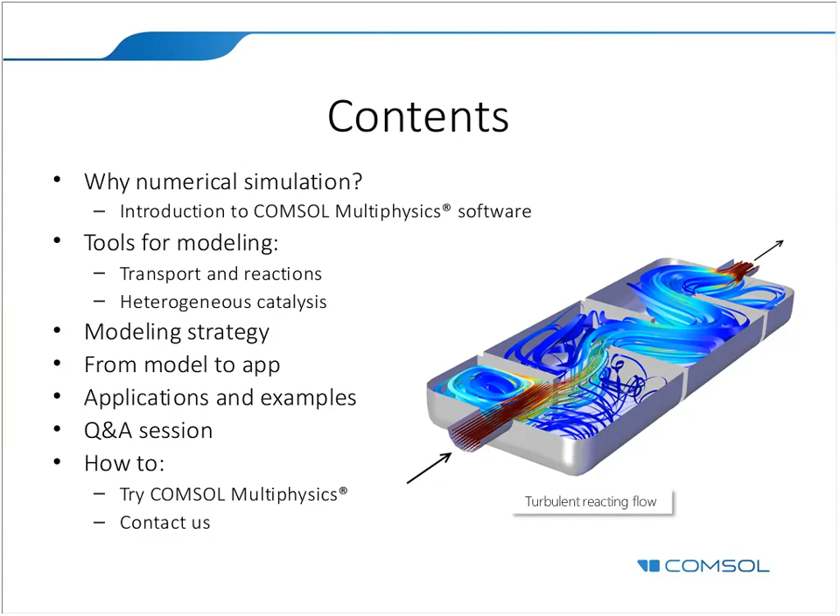Okay. So let's start by asking ourselves a question: why simulate reacting systems? We ask this because traditionally this type of simulation has been quite limited in the chemical engineering education. There has been a lot of relying on experimental and empirical results to govern the design or the studies of a reacting system. And if simulation has existed, it has been to simulate in 0 dimensions, basically, only accounting for the evolution of the reacting system as a function of time.

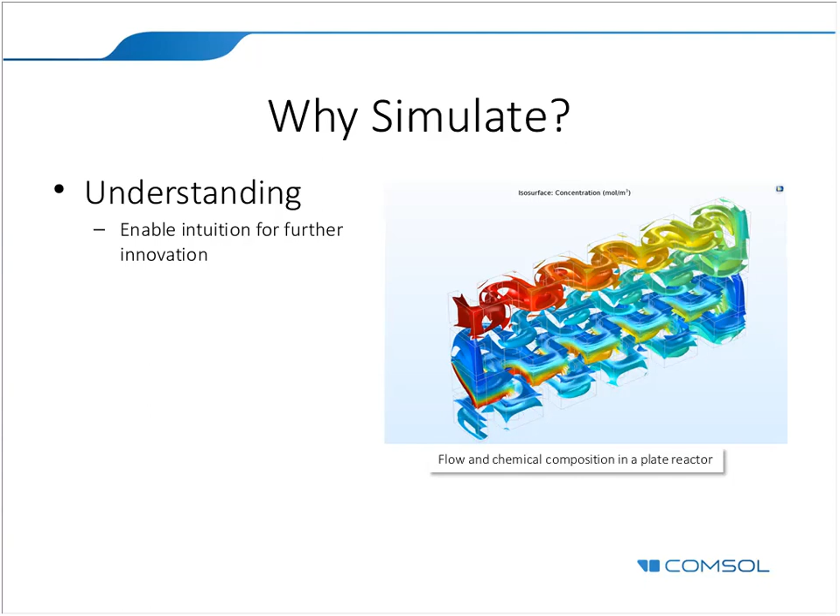But as simulating tools and computational power have increased over the years, simulation has been attainable for all chemical engineers, also high fidelity simulations. So first of all, mathematical modeling and simulation provides an understanding of the different parameters that make up your system and how they affect each other. And with this understanding comes intuition that leads to new ideas that allow you to take big steps forward in the development.

And so modeling and simulations let you propose some design and conditions, and then it allows you to tinker with them and optimize them. And a lot of this can be considered and achieved before proceeding to expensive pilot plants. You can stay in the lab for a longer time before you start building prototypes and deploying to manufacture, going to the full scale, for example.

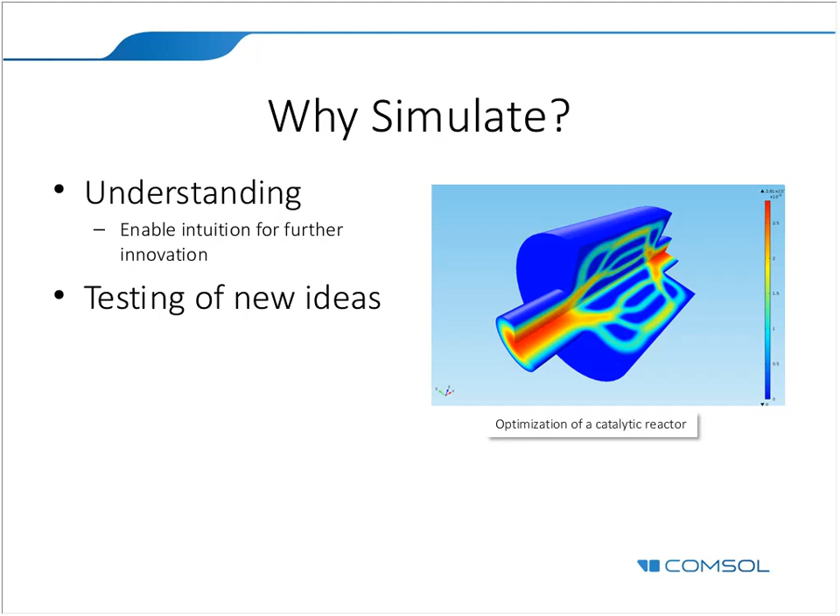And of course, it also lets you propose the full-scale design. Once you have working understanding and once you have improved your model at the lab scale, you can adapt the process to different operating conditions or the reacting system, study it at the full scale. And in some cases, if you're dealing with a process, it also allows you, of course, to optimize it.

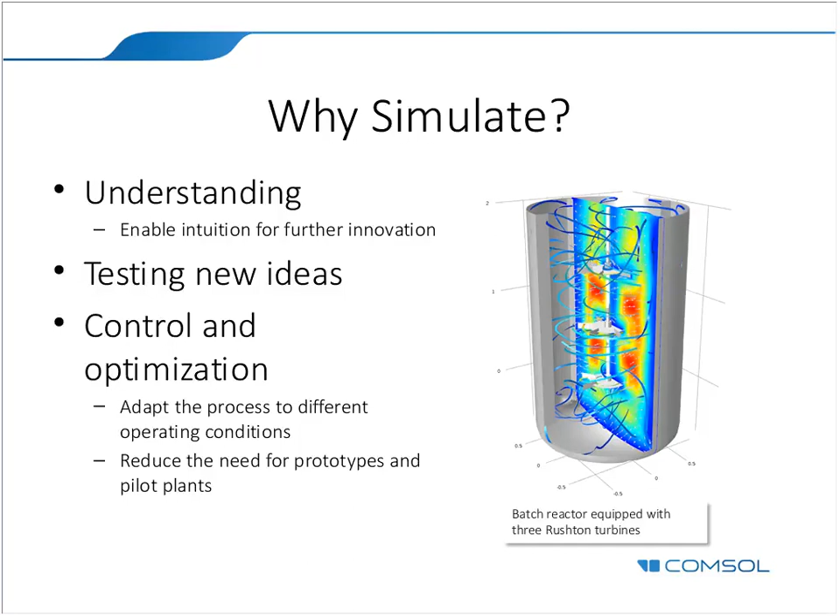And sometimes you need to know what would happen if, for example, an accident happened in a plant, or if an accident would happen in a casino, like one of our users experimented with. What would happen if there was poisonous gas in a ventilation system with reactions and so on. A real-life experiment could be difficult, if not dangerous sometimes. And simulations can provide a decent estimate of what could happen in a relatively inexpensive way.

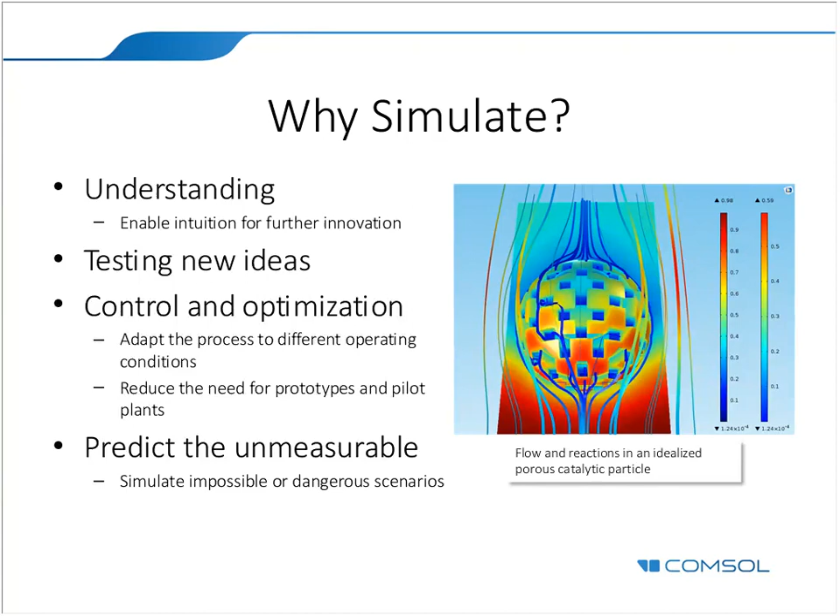But of course, the real world is not simulation. So you have to work together with experimentalists, and you have to validate the models in order to use them for real studies. And so that's also a tool that we include in the COMSOL chemical reaction engineering products: a way to perform parameter estimations and a very efficient way to perform validation of your models with experimental results.

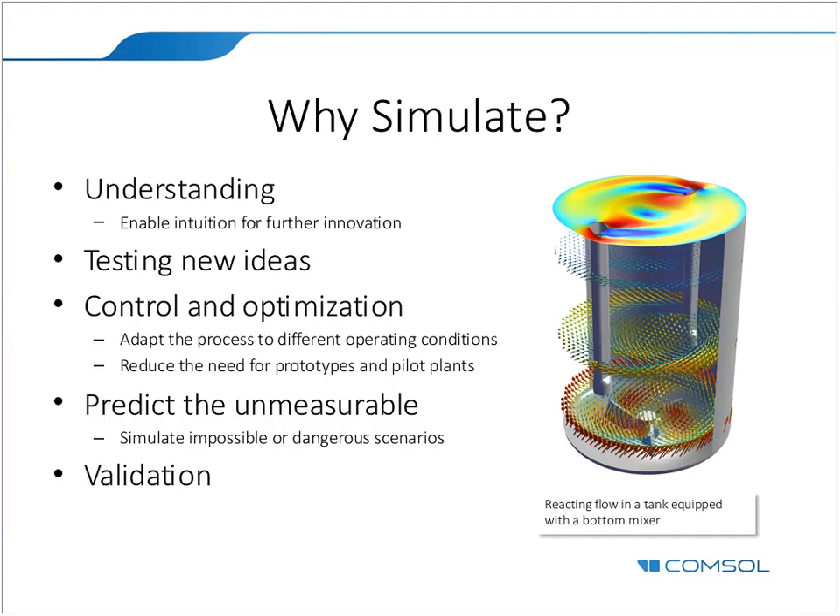And so the Chemical Reaction Engineering Module presents a number of graphical user interfaces in order to model reacting systems, such as chemical reactors, or basic studies of heterogeneous catalysis, and processes with transport and reactions, also including fluid flow. If you need to include turbulent flow or multiphase flow, then you would use the Chemical Reaction Engineering Module in combination with the CFD Module or the Mixer Module.

Then we have more specialized products for modeling of batteries and fuel cells, which actually is an applied branch of chemical reaction engineering. I myself studied chemical reaction engineering with the special branch of applied electrochemistry. And the same thing, we have the Electrodeposition Module, Corrosion Module, and the more generic Electrochemistry Module. Less generic than the Chemical Reaction Engineering Module, but more generic than the other electrochemical products.

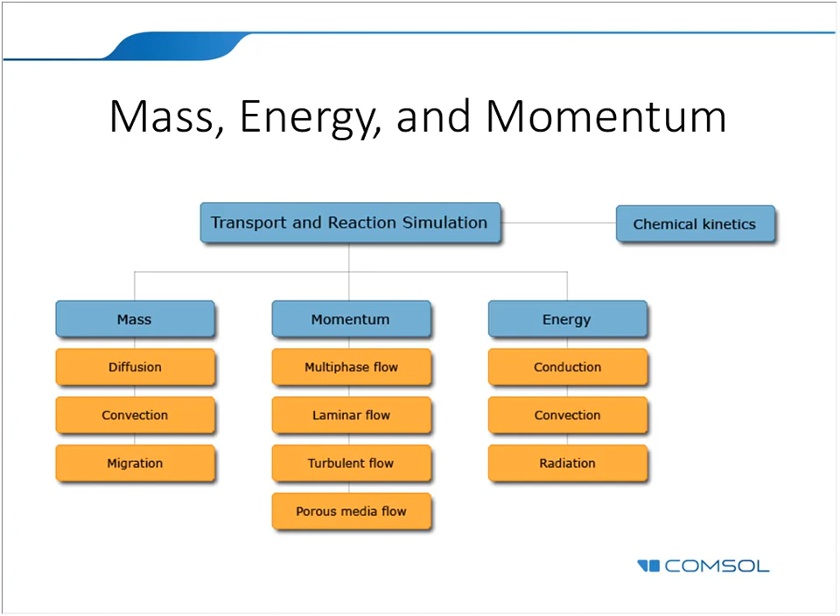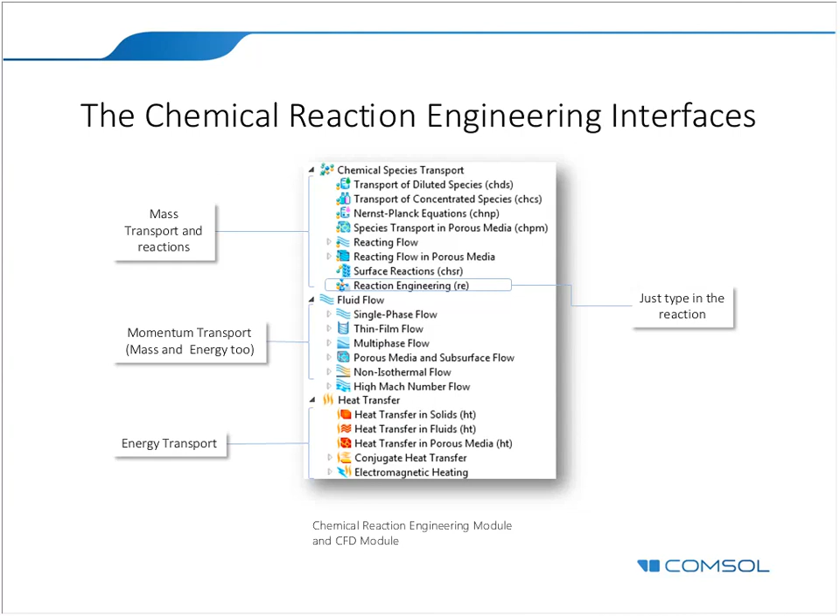So here you can select from transport interfaces to model multicomponent transport and reactions, single-phase and two-phase flow, surface reactions or homogeneous reactions, laminar and turbulent flow, heat transfer with conduction, convection, and radiation, for example. And then a specific chemical species transport interface, the Reaction Engineering interface, is able to generate mass and energy conservation and transport equations from chemical equations that you type in almost like using pen and paper, and I will demonstrate this later on.

A typical modeling strategy, or maybe an ideal modeling strategy, is to start the analysis of a reacting system using perfectly mixed systems, and those are usually the systems that you have in the lab. So a space-independent model with respect to concentration and temperature is a good way to verify and validate the reaction mechanism that you want to study, maybe later on in combination with transport. So once the mechanism is validated and verified, models with concentration and temperature distributions also in space might be investigated.

So we go from studying systems as a function of t, time, to studying systems as a function of time, x, y, and z, for example. And so you might calibrate and compare your model results to experimental data from lab-scale experiments with very controlled composition and temperature. And you might actually use COMSOL to run parameter estimation, and that might give you a good match provided that the mechanism is the correct one, and that you have covered a representative range of operations.

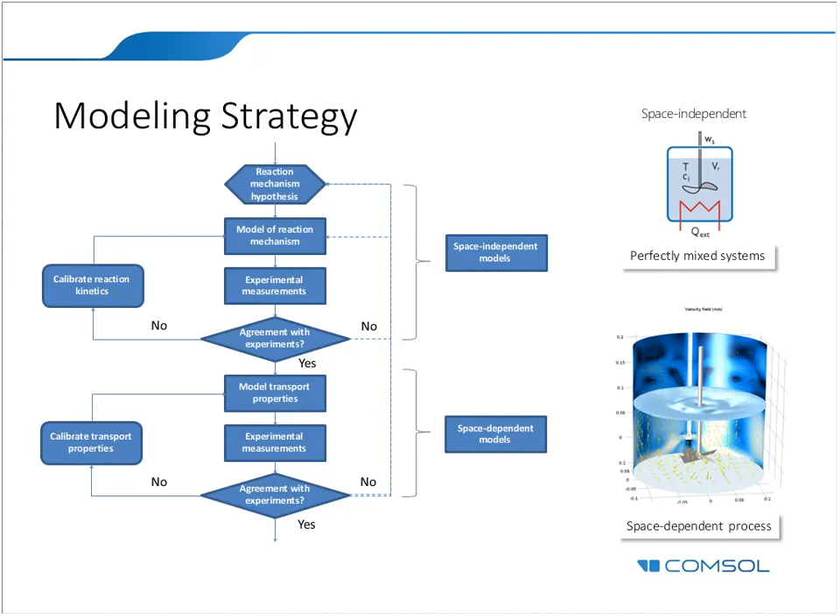So an almost opposite strategy might be implemented for the study of heterogeneous catalysis. Nowadays, with the ability to take microscans and produce 3D geometrical descriptions from microscans, we can now use these geometrical descriptions in detailed 3D models of catalyst particles or catalysts at the microscale. And those detailed models can be used for homogenization in order to model a larger number of particles.

And as you know, if we have to model a larger number of particles in a unit cell, in a fixed bed or a packed bed, or a porous media in general, we cannot afford a detailed description. So a large number of particles can then be used to describe a unit cell or a packed bed reactor, monolithic reactor, or fixed bed reactor. And the homogenized particles model might also be used in fluidized bed models, for example.

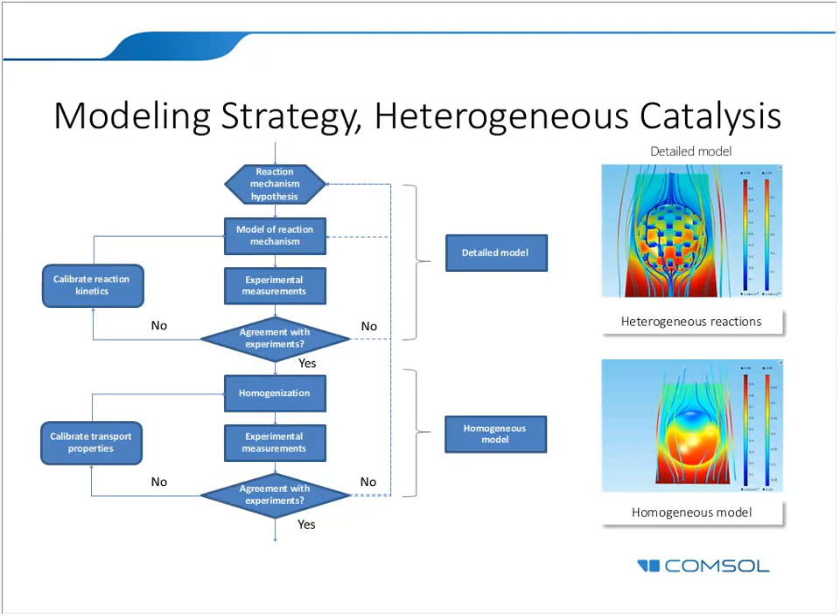But let me start with a little example. Those of you that listened to the Reacting Flow webinar, this is actually the same example, but I will not take it that far because I want to go to an example of a heterogeneous particle and a homogenization of the heterogeneous particle. So I will just show you how to type in a chemical mechanism into COMSOL Multiphysics.

So we will model a reacting system that includes two reactions. One desired reaction, A plus B gives C and D, and then a parasitic reaction, D plus E gives F and G. And I will just very quickly show you how to go from a 0D model, so we will set this up as a space-independent model, and then how we go from a space-independent model to a full space-dependent model.

So now we'll try to share my screen here. And then I will try to go to the... So I hope you see, Jen, do you see the model wizard now? Yes, looks good, Ed. Excellent.

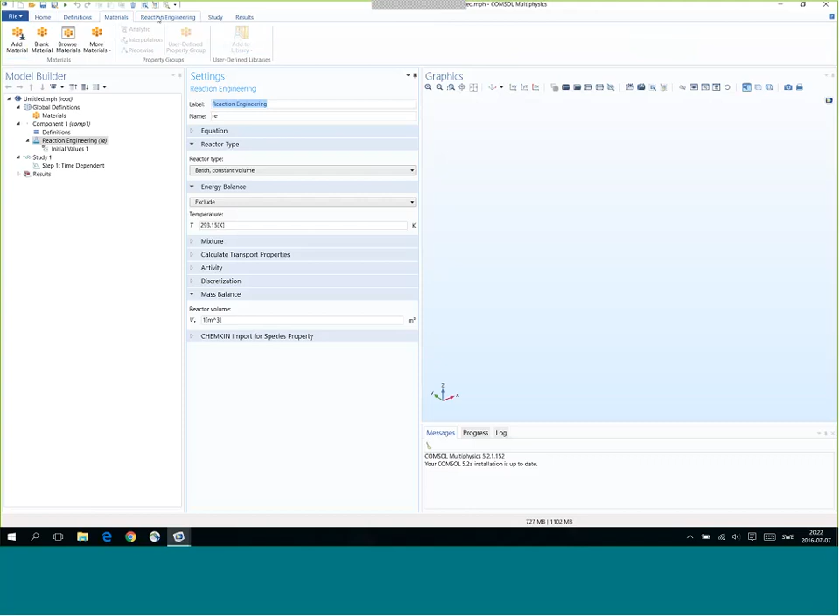But we can compute the study and so on. So a summary of the workflow is contained in the home page. But then the tabs here also depict the workflow. So we have definitions to set up variables and parameters. We have materials to set up different material properties. And we have the reaction engineering interface, which is where we set up our problem.

So what I will do now is I will add a reaction. And I do that by clicking in the ribbon, just clicking reaction. And here I can just type in A plus B gives C plus D. And I can select what type of reaction I want, and I want a reversible reaction. And now we start by modeling an isothermal system, but we could have used an Arrhenius expression with activation energy and so on in order to model a non-isothermal system.

So I just type in the rate coefficient here, 10 cubic meters per second per mole, and the reverse rate constant 2 here. So that's for the first reaction, and we can set up the second parasitic reaction. And you remember that consumes some D by reacting with E and gave F plus G. And also this one, we want it to be reversible, but then with a slightly lower rate constant like this.

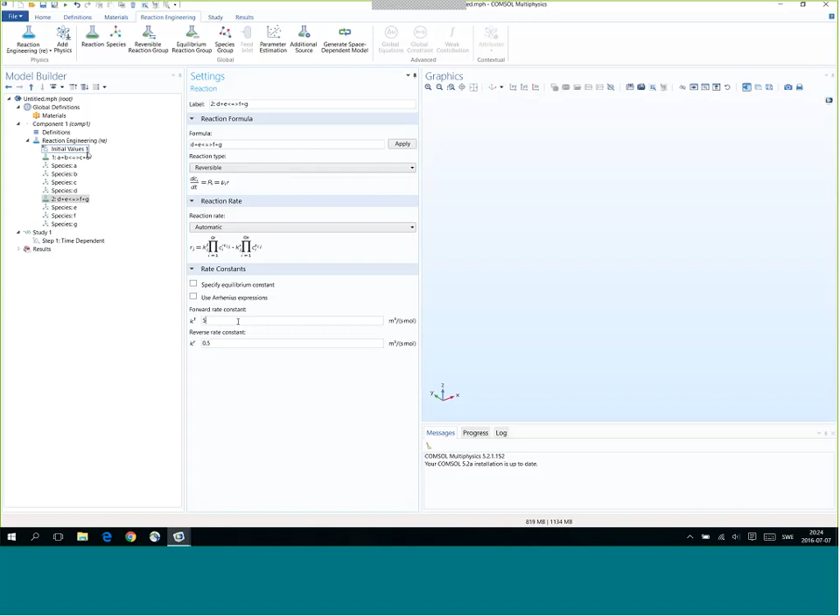And then what we now need is to have the initial values for this set of reactions. So in order for the first reaction, A plus B, to start, we need some A and we need some B. We don't need some C and D because having A and B will start the reaction. But for the parasitic reaction, we need some E. And so we put some initial concentration there.

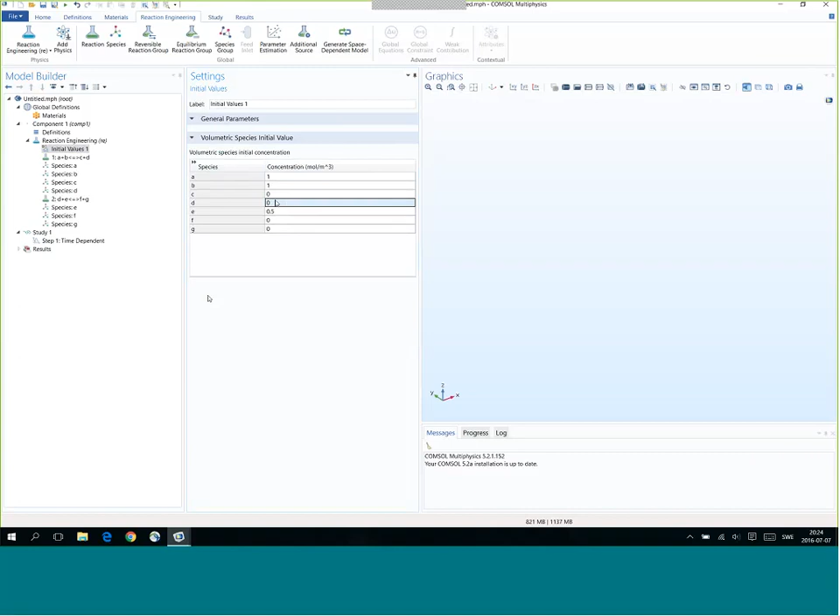And then if we look at the time-dependent study, it goes from 0 to 1 second. And so that's okay. So we go to the study here and we click compute. And hopefully, if I did everything correctly, we should get the concentration profiles as a function of time. And so we can see here that the green line here is A or B, and it decreases in a monotonous way. We also see the production of C, which increases in a monotonous way.

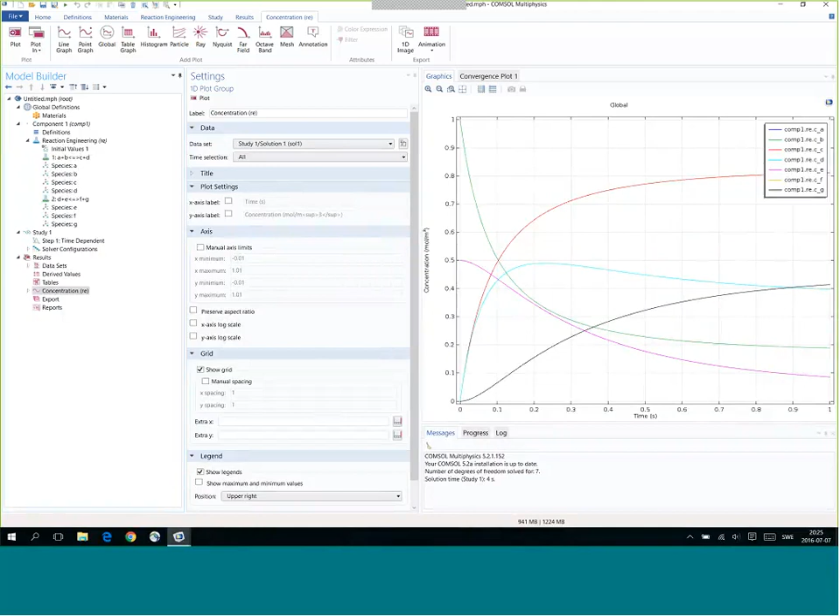But the species D, which is in light blue here or almost turquoise, we can see that it increases initially and then passes through a maximum to decrease and then to flat out towards equilibrium. And that's because it's consumed in the parasitic reaction, and that's slightly slower. So initially, we have to produce some D in order to get any substantial rate of this reaction. And so we can see here that we get then the production of F and G shown by the black line here.

And so if we go back to the reaction engineering tab here, now assume that we're satisfied with this. What we could do is, of course, to add a parameter estimation study. If we had experimental data, we could have tested, validated this mechanism, A plus B gives C plus D, and D plus E gives F plus G. And in the application library, we have examples with 50 reactions, so you can perform this type of study with a large number of species and reactions, of course, and also run parameter estimations.

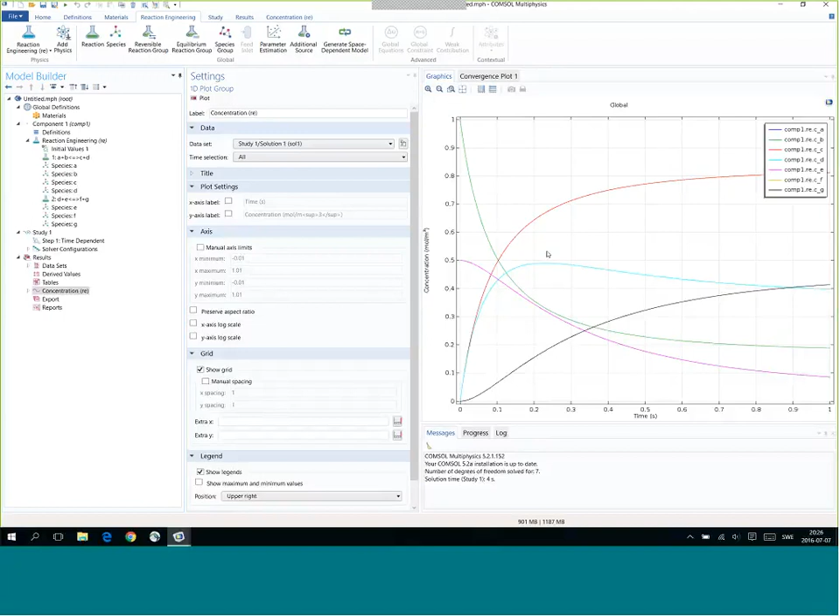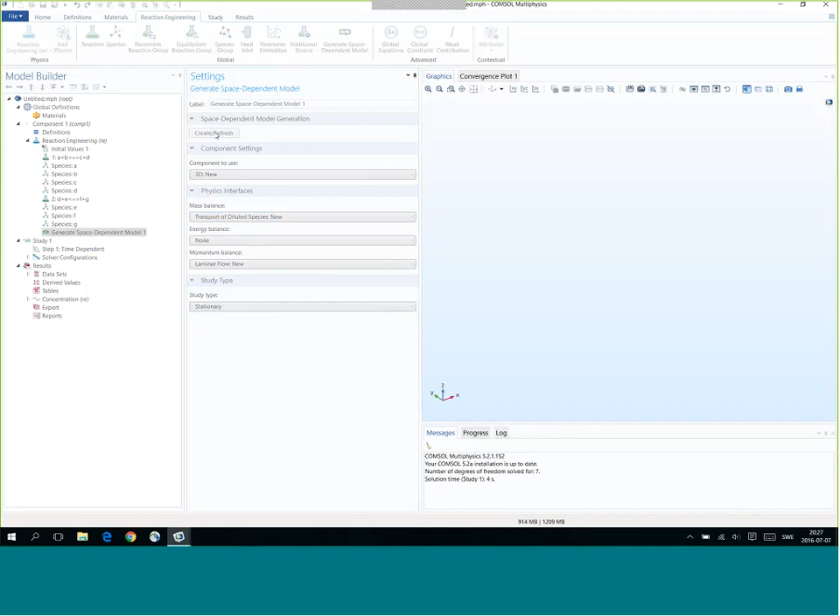But assume that we were satisfied with this, we could actually click the Generate Space-Dependent Model, and this will add a node for generating a space-dependent model from this reaction kinetic mechanism. And this would, for example, allow us to set up a transport of diluted species, and also to set up laminar flow. And once I create that, COMSOL will automatically generate the physics interfaces required for this, and it will also create a first geometry. So now I have two model components in my model.

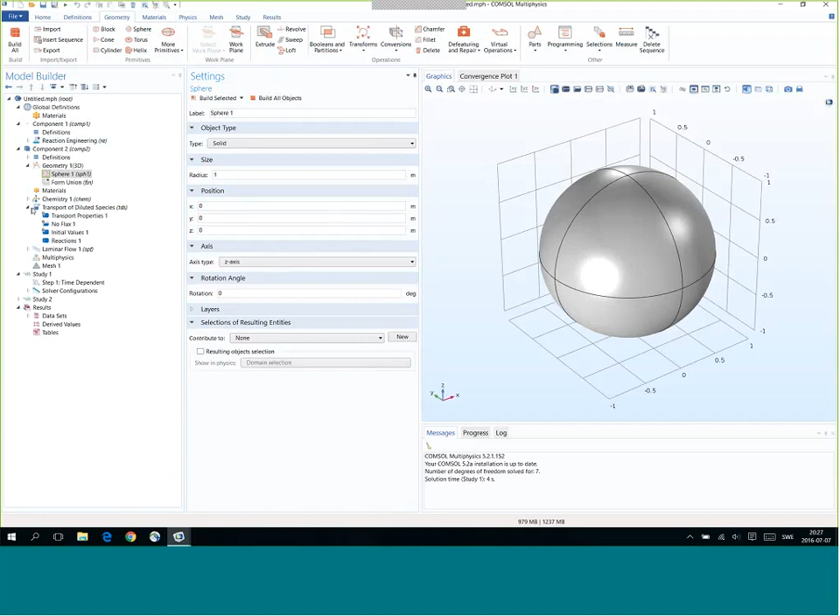One 0D, which is the study that we just set up, and then a second one which includes a geometry, and that could be anything, of course. That could be, for example, if we were studying a catalyst particle, a sphere, and that will set up the transport of diluted species in that sphere. And also, if we had some laminar flow around that sphere, it will set up that too. But we will not go into details with that.

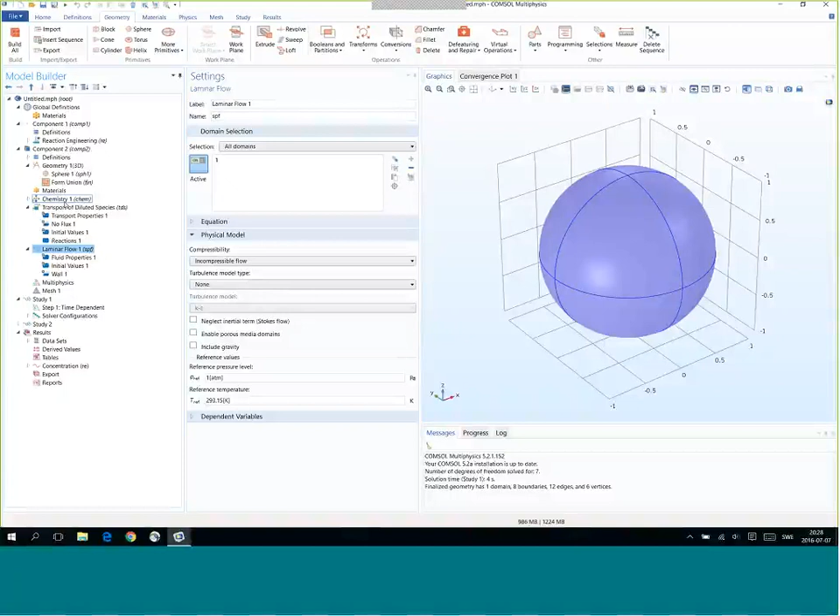I'll continue assuming that this is done. There's some physical work to set this up, but other than that the principle is exactly like I pointed out here. Just from your reactions, set up the fluid flow problem and the mass transport problem, and you're there, basically. Okay.

Jen, can you see my screen? Hi, Ed. Yes, it looks good. Okay, excellent. So I'll try to go back and stop sharing. All right, now we're back to the slides. So Jen, am I okay here with the slides? Can you see the slides? Yes, now you're on the slides.

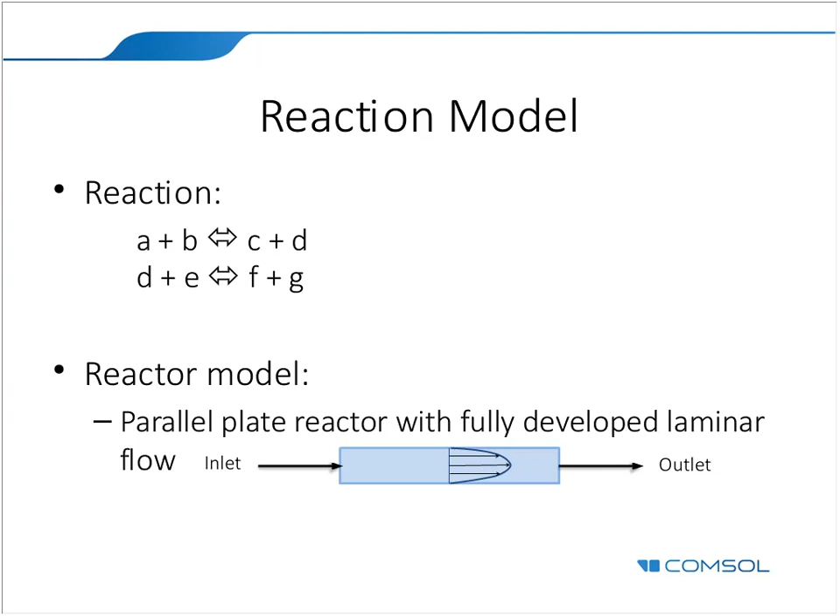Okay, so here is what we actually did. So let us recapitulate the modeling procedure. As we all could see in the demo, setting up a space-independent model is very straightforward. Just type in the chemical equations, and the species list and the material balances for each species are automatically formulated.

What I didn't show is that the reaction mechanism assumes the mass action law, but you can actually edit that. So you get an analytic expression for the reaction mechanism as a function of the concentrations, and you can edit that, like you do with pen and paper. You can type in any expression for your reaction kinetics, and then from this you can set up the space-dependent model like I showed. These are formulated automatically by clicking Create Space-Dependent Model.

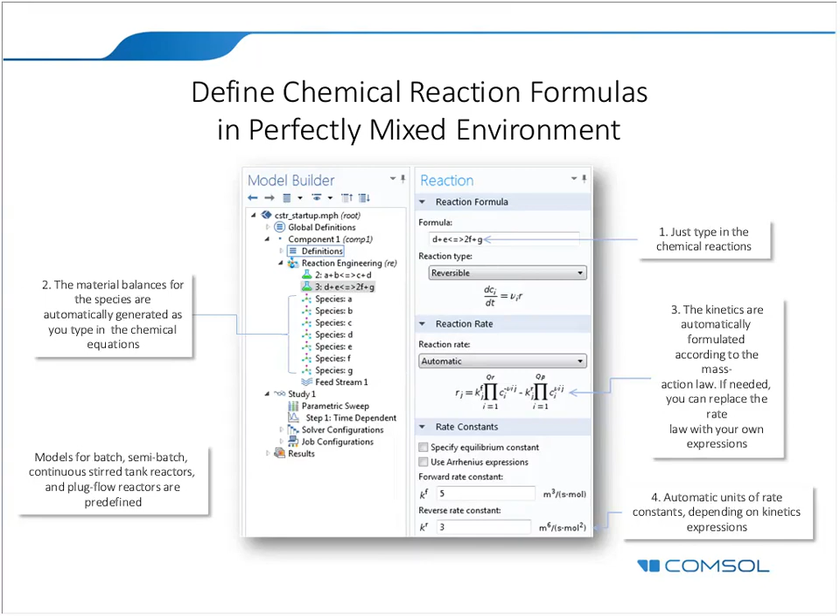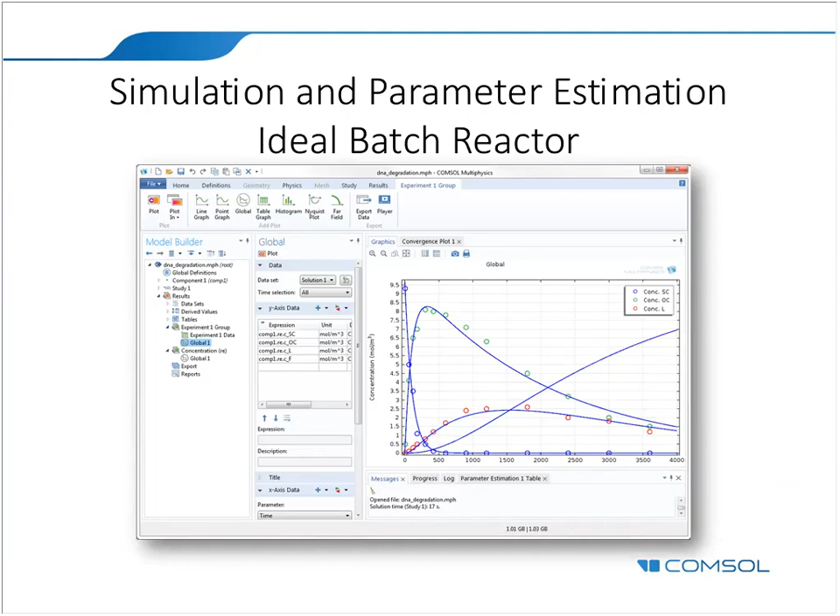So let's now take another, well, let me just switch. What I didn't show was the ability also to perform parameter estimations, which is also exemplified in the application library in COMSOL Multiphysics. And I showed you in principle how to extend to space-dependent models.

4 is the formation of the product, for example, and 5 is the desorption of the product from the catalytic site. 6 is the transport of the product in the pores from the catalytic site to the pore mouth, and 7 is the transport of the product from the pore mouth to the bulk of the solution. And this is naturally described by COMSOL Multiphysics if we have set up the system correctly.

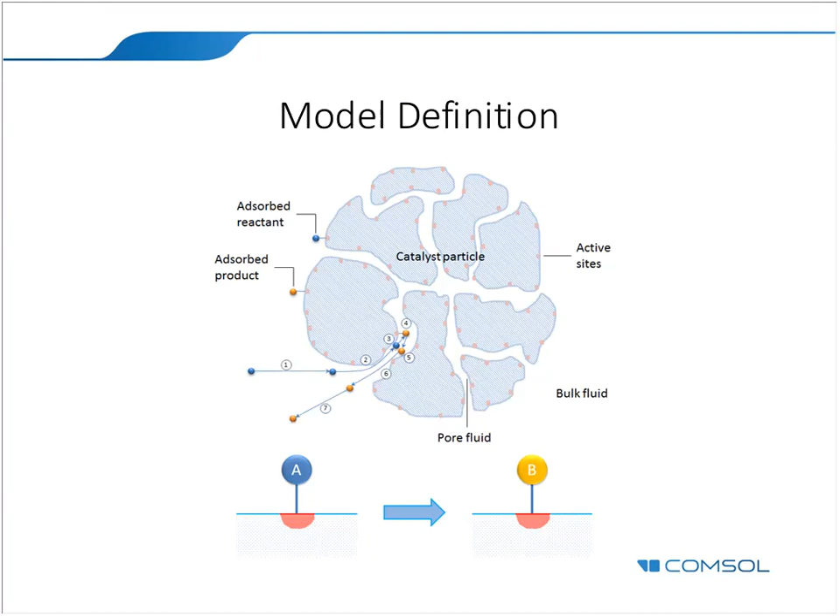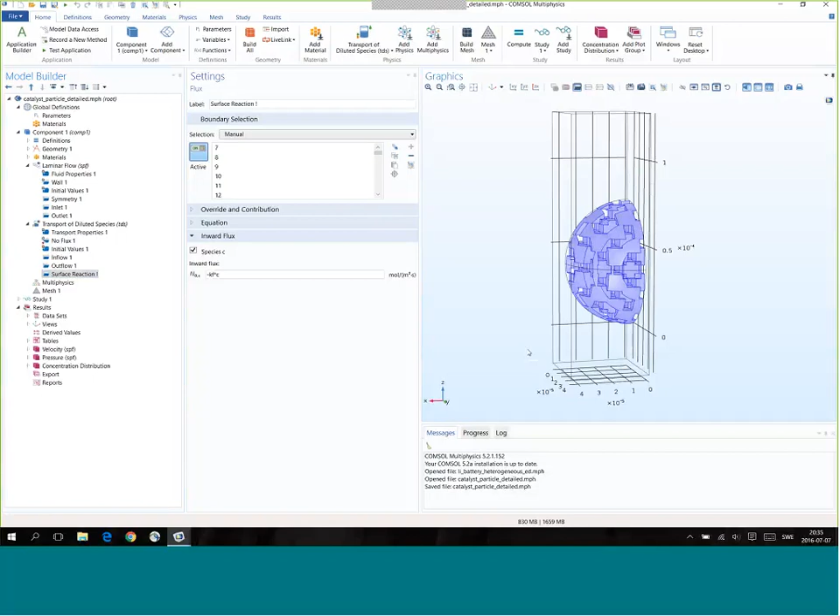And so if I share my screen again, I hope you can see now I have the catalytic bed, the catalytic particle here. So it's a fairly complex geometry now. Actually, I have drawn this in COMSOL.

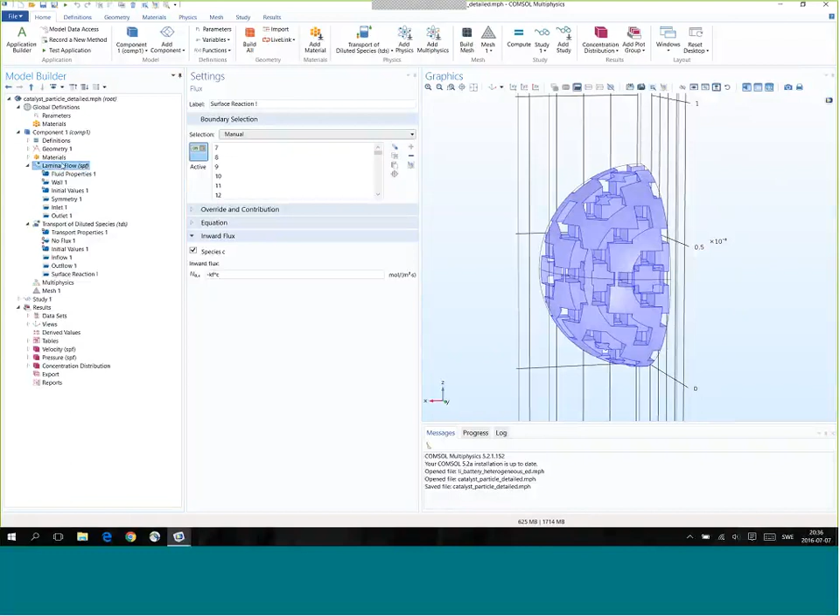And so if you look at the reactions here, they're surface reactions. They take place at the blue surfaces here. And here it's a very simple reaction, a linear reaction kinetics. And what I've done now is exactly what I showed you in the space-independent model when we click Create Space-Dependent Model: I set up a laminar flow in the domain around the particle and inside the pores in the particle, and also transport of diluted species everywhere, of course.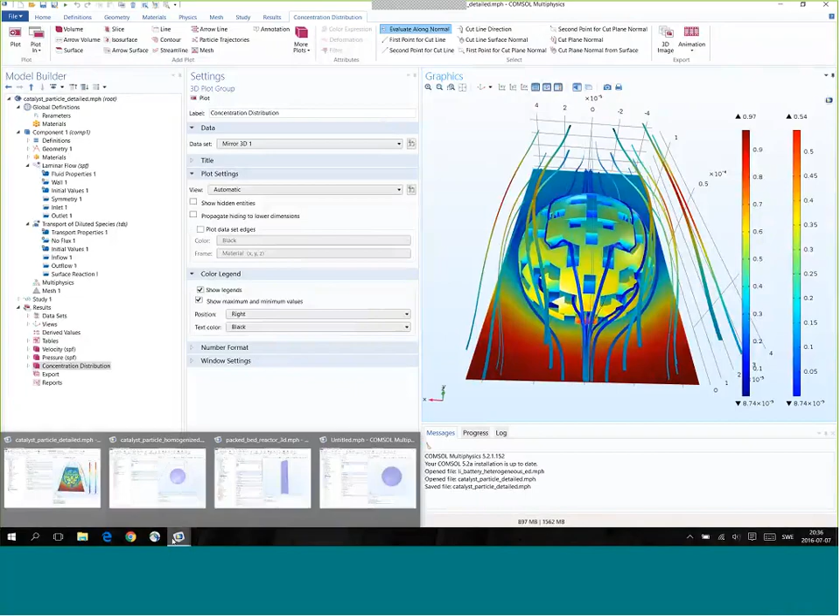And that results in a concentration distribution and a fluid flow both inside the particle and around the particle that we might use to set up a homogenized model of a single catalytic particle. So let me just switch to another model.

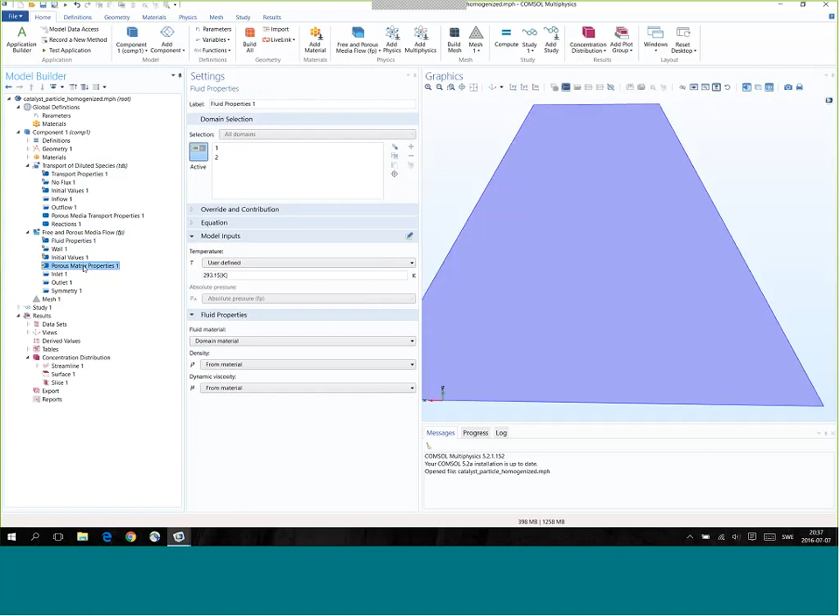So this is exactly the same size and geometry, but now the particle is described as a porous media. And so we have free and porous media flow. We have the fluid properties, and the porous matrix is only defined in the particle itself, while the transport of diluted species is defined everywhere with some porous media transport properties, like I said, a porosity and a tortuosity, given in this case by the Millington and Quirk model that you see down here. So there are different models for porous media flow.

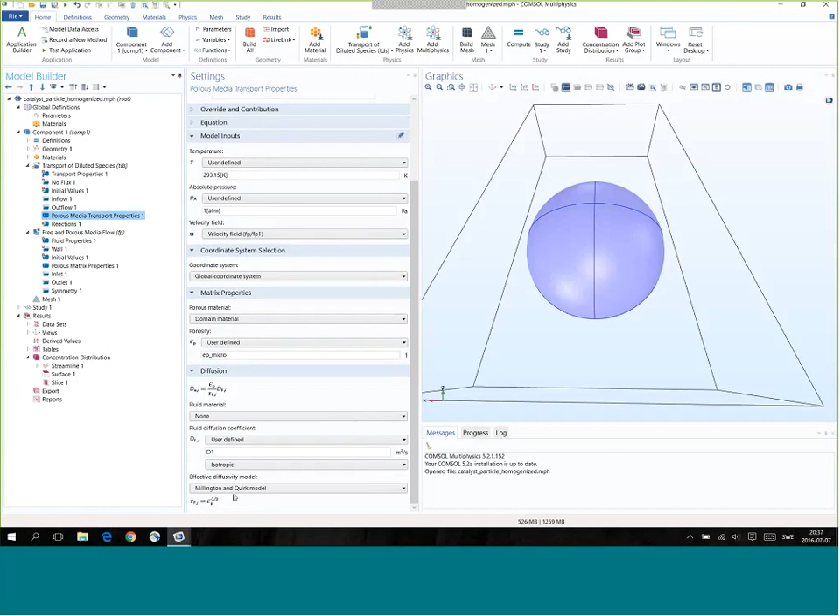And that results, exactly like before, in a concentration distribution and a flow distribution, both inside the particle and around the particle. Now the flow is porous media flow. In the previous model, it was actually free flow, but in very narrow pores. And here it's an effective model. And the same thing with the reactions. Now it's transport and reactions in a porous media, in a homogenized slab inside the spherical particle.

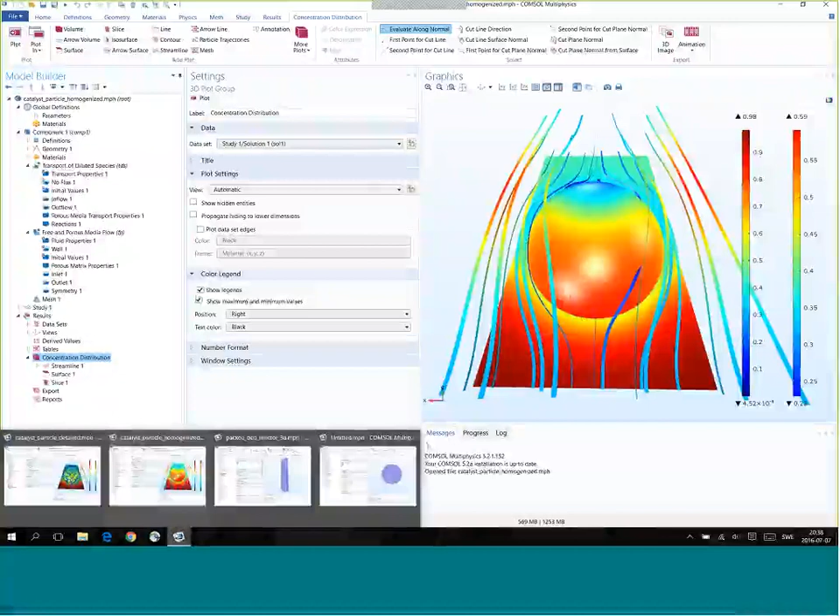And then we can take that a step further by including a number of these particles in one unit cell. And once we have that, we can step up, take the second homogenization step, and this is exemplified here. This is a model from the Application Library in COMSOL, where we set up the reaction kinetics in 0D, and then define the fixed bed here. So the fixed bed rests on a perforated plate at the bottom.

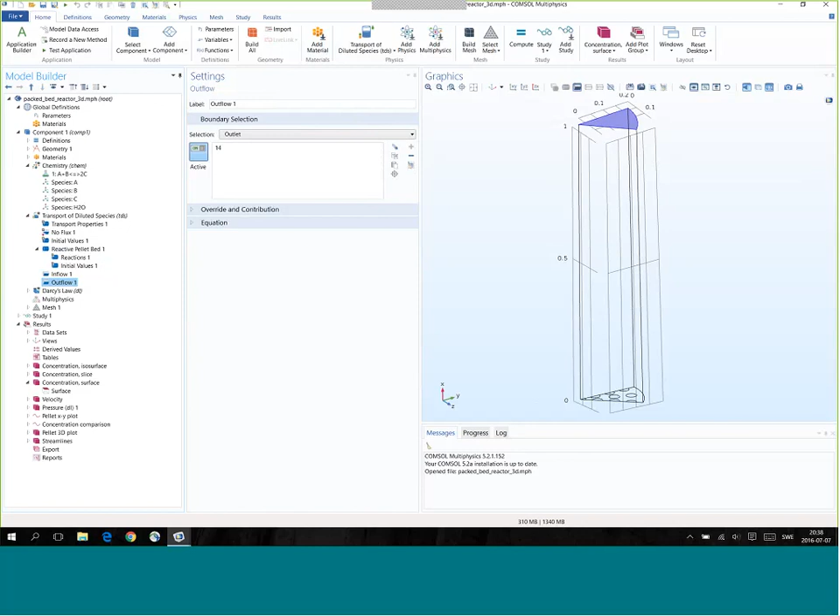So we can see the inflow conditions here at the bottom. That's in the perforations in the perforated plate where the fixed bed rests. And between the perforations, there is actually no feed of reactants. And at the top, we have the outflow. And in every point in space, we have these spherical particles.

So this model is actually a four-dimensional model, but the fourth dimension is in a completely different scale. It's at the micro scale, while X, Y, and Z are at the macro scale of the fixed bed. So this is the bimodal porous model that I mentioned previously.

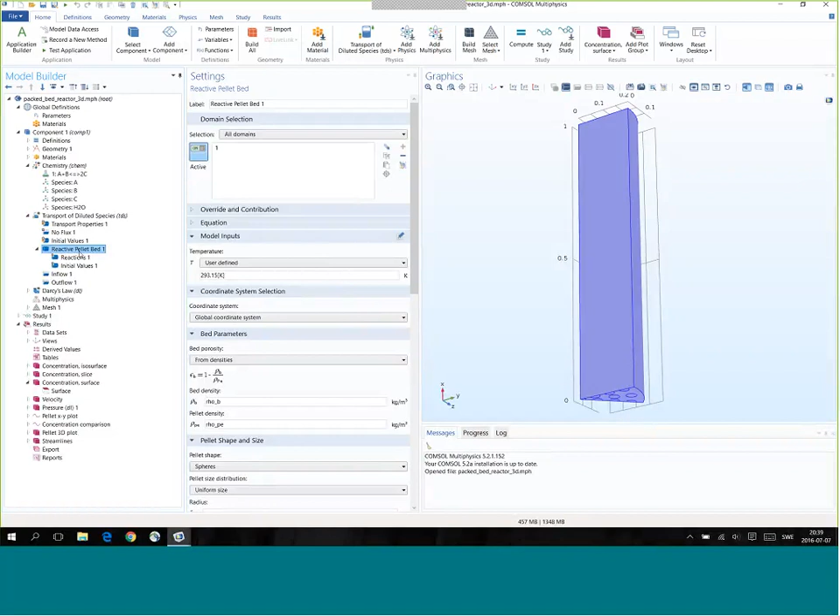And so now the reactive pellet bed is discretized with a separate fourth variable that represents the radius of the particle, and you can input, exactly like before, the average radius of the particle, the porosity and tortuosity, and so on. And you can automatically convert surface reactions to this type of reactions in a homogenized particle reaction diffusion process, or reaction transport process in this case. All right.

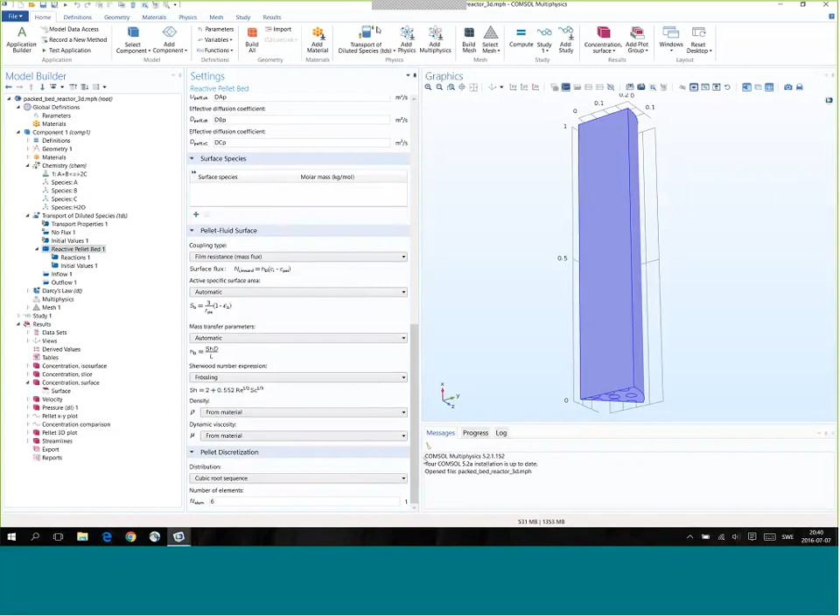So let's go back to the presentation. So Jen, can you see my slides now? Not yet. Okay, please. There we are.

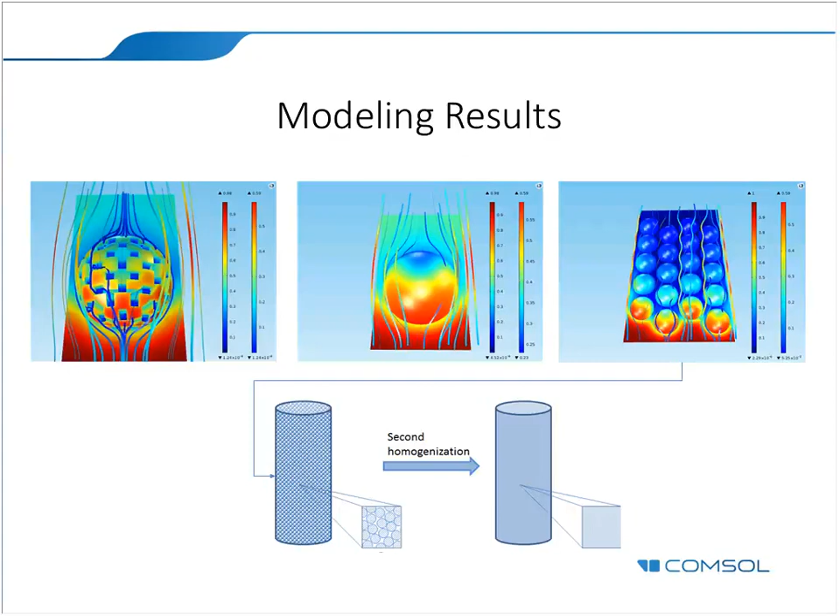And that second homogenization, we have that type of interface in the new COMSOL Reaction Engineering Module, where in 3D it includes four independent variables, which are X, Y, Z, well, T too, and then the radius of the particle, which is at a completely different scale.

Another thing that you might be familiar with is the new application builder we introduced. Well, now it's not that new anymore; we introduced that a year ago. So the models that we created, that I showed you in the model tree, those models can be used to create very dedicated graphical user interfaces for very specific purposes.

So you could create, in this example, a tank reactor, and you see in the background the COMSOL user interface with the model tree and with all the laminar flow, rotating machinery, the boundary conditions, all the type of stuff that is required to set up a model. But to use such a model, all this knowledge about the technicalities of the mathematical model might not be required.

So what you can do as an expert is set up a user interface with just some simple inputs and outputs. In this case, to select different impellers, the rotational speed of the impellers, concentrations, operating conditions, fluids and so on. But everything else is just set up. So you, as a user, select the input data and the operating conditions, and then you just click the compute button.

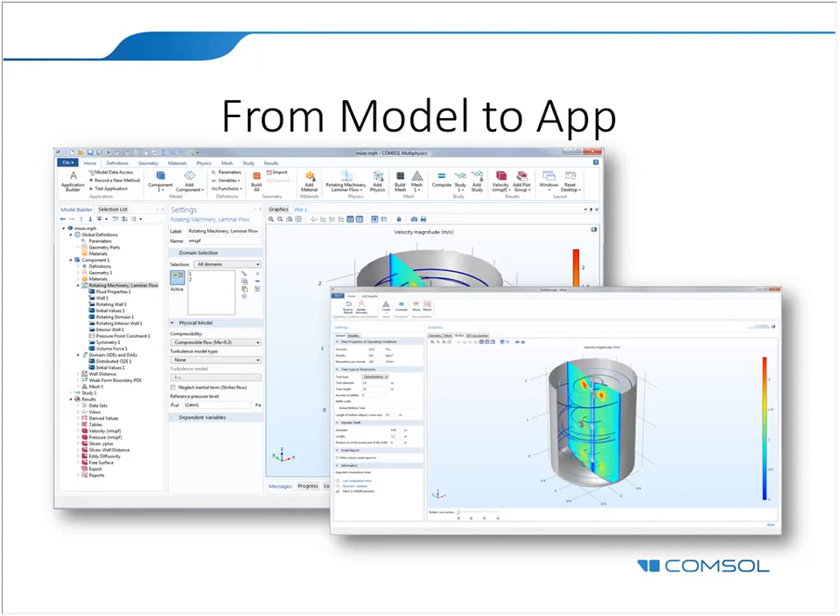What I didn't show you in this presentation was that there's also a possibility to include external data. High fidelity models require high fidelity kinetics and thermodynamic input data. So you may import this data from Chemkin, NASA, NIST, JANAF files. You may also link to other commercial packages for thermodynamics and kinetic data through the so-called CAPE-OPEN interface, which is a common interfacing format that can be used for process simulations.

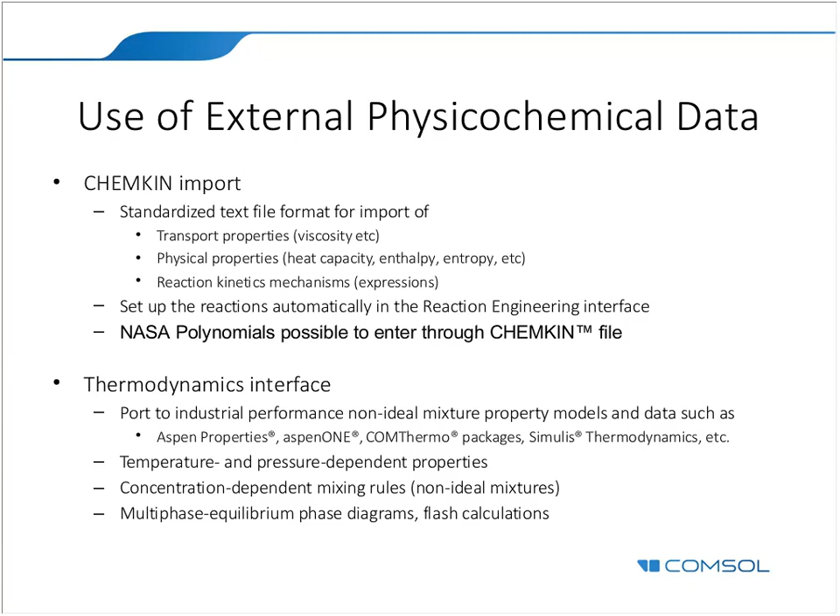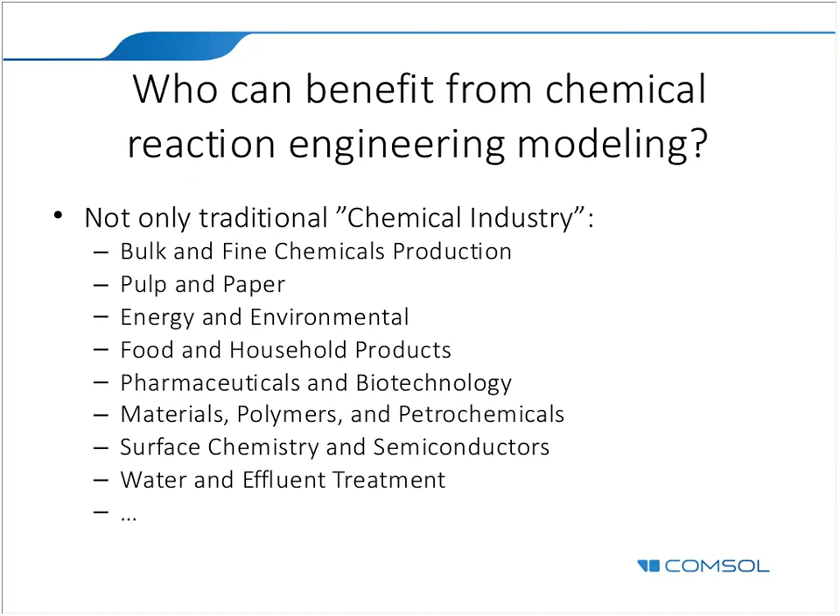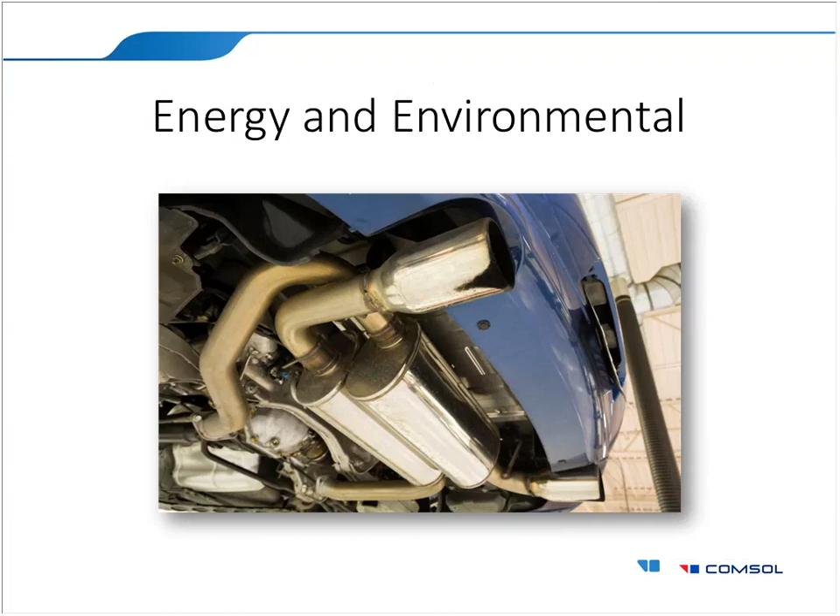The examples that are included in our application library are extensive. This list is of typical applications for the type of simulations described in this presentation, and it's not limited to what is traditionally called the chemical industry, of course. A classic case for simulating transfer and reaction processes in catalysis and reaction engineering is the monolithic reactor, for example in catalytic converters. So we have catalytic converters. We also have diesel particulate filter examples that you might use as a starting point for your modeling.

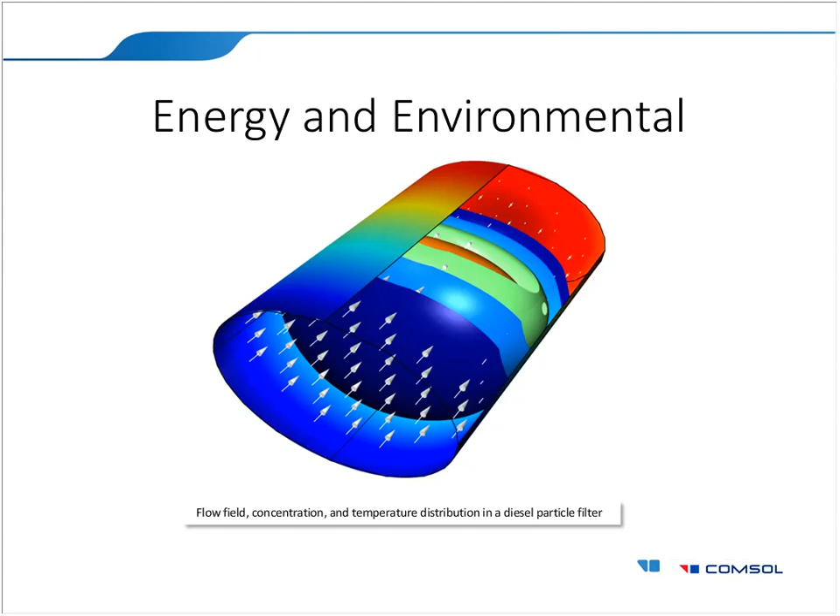This figure shows exactly that: you can use these application library models as a starting point. This figure shows the simulations of the gas composition in a diesel particulate filter. This model actually also builds up the layer of particles and increases the pressure losses as that layer builds up. And as it heats up, the soot layer starts to be combusted, and then the porosity increases again due to the consumption of the soot particles.

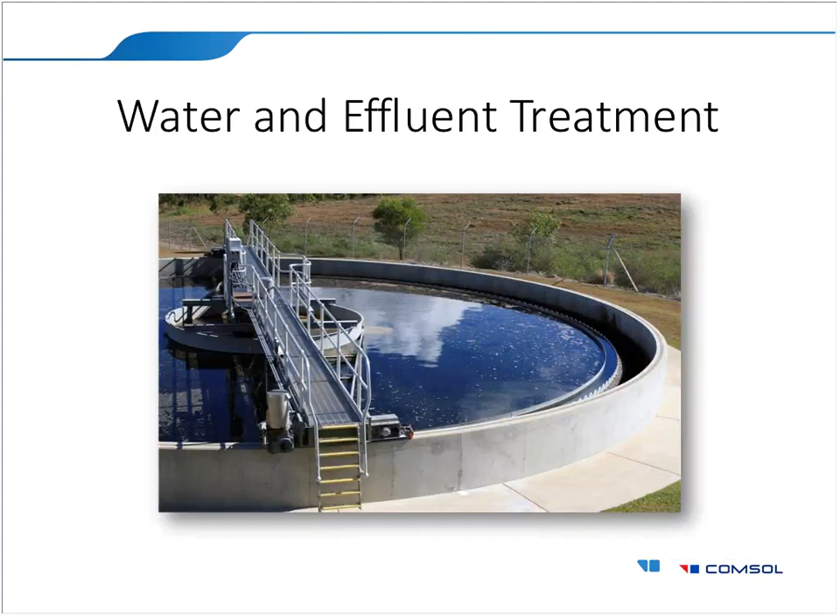In addition to using resources efficiently, we also have a lot of chemical engineers concerned with regeneration and recycling of effluent streams, and that also includes a lot of reaction engineering. We have such an example also in our application library.

Also, a lot of chemical engineers are active in the field of pharmaceuticals and biotechnology, where drying is a central process. For pharma and bio applications, freeze drying is a common process, also in the food industry for heat-sensitive products. We have such an example also, where water is removed through the sublimation of ice, leaving a porous material when the process is finished.

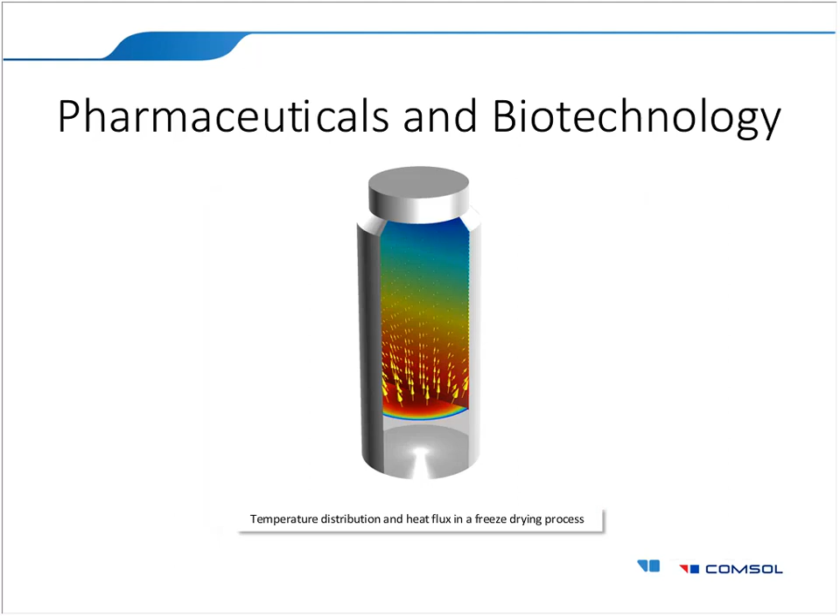And the production of bulk chemicals, that's of course where the main community of chemical engineers is, and where a small improvement in the design or the process leads to very large benefits or savings in costs. We have examples of steam reformers, for example, or other endothermic reactions that occur in tubular reactors or other types of continuous reactors typical for large chemical processes.

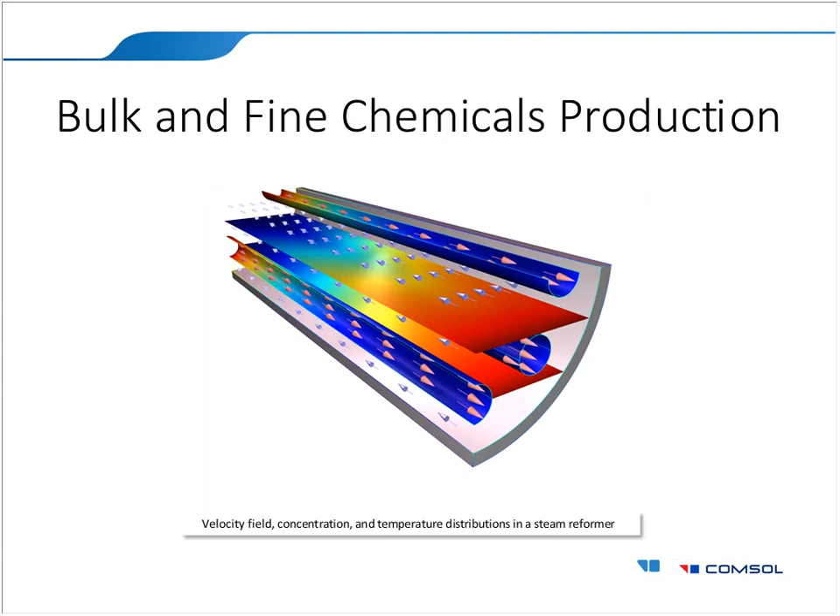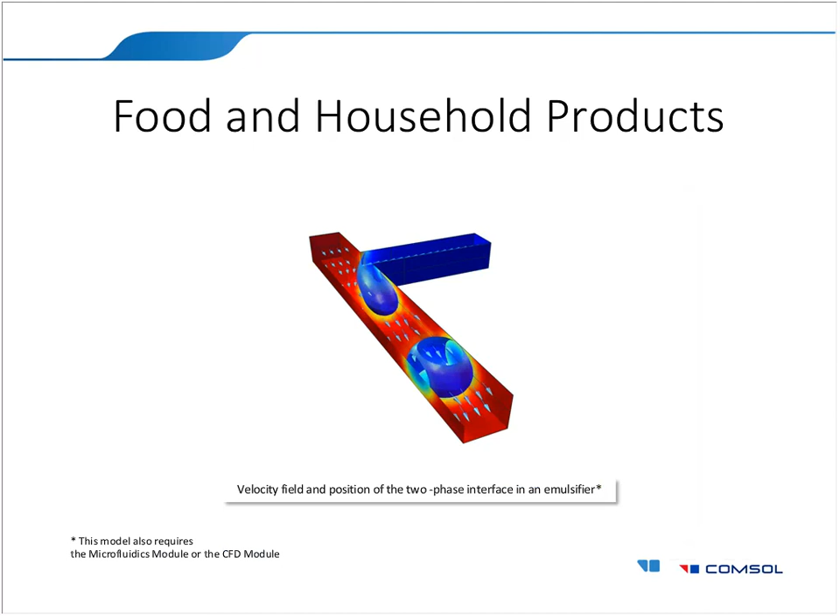Emulsions find wide applications in the production of food, cosmetic, and household products. The properties and quality of emulsions typically depend on the size and distribution of the droplets, which you can study using the Reaction Engineering Module in combination with the CFD Module. Petrochemistry transforms crude oil and natural gas into useful products such as fuels and raw materials.

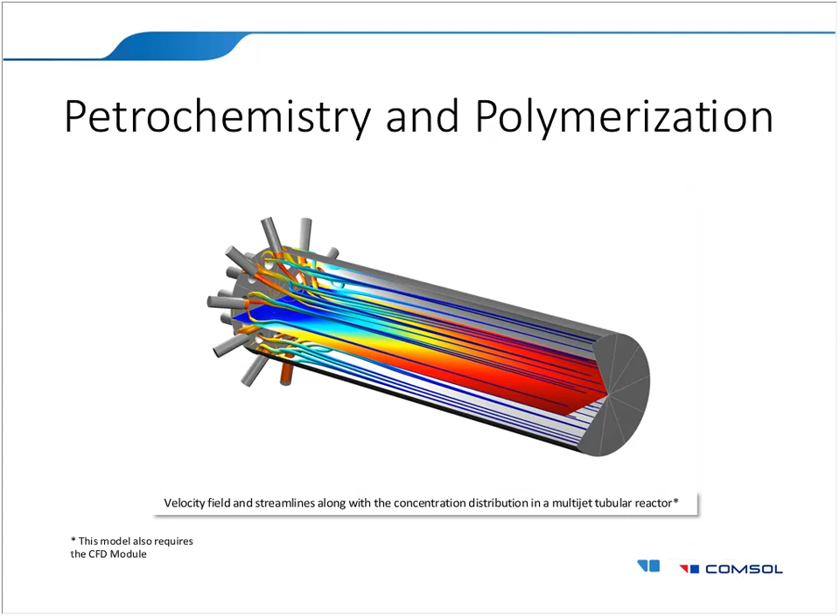And the polymer industry makes use of the petrochemicals to produce plastic. We have such examples, for example, this multi-jet polymerization reactor. And I also mentioned chemical vapor deposition. And here are two examples of surface reactions, one for a biosensor and one for a CVD reactor, a small unit cell here.

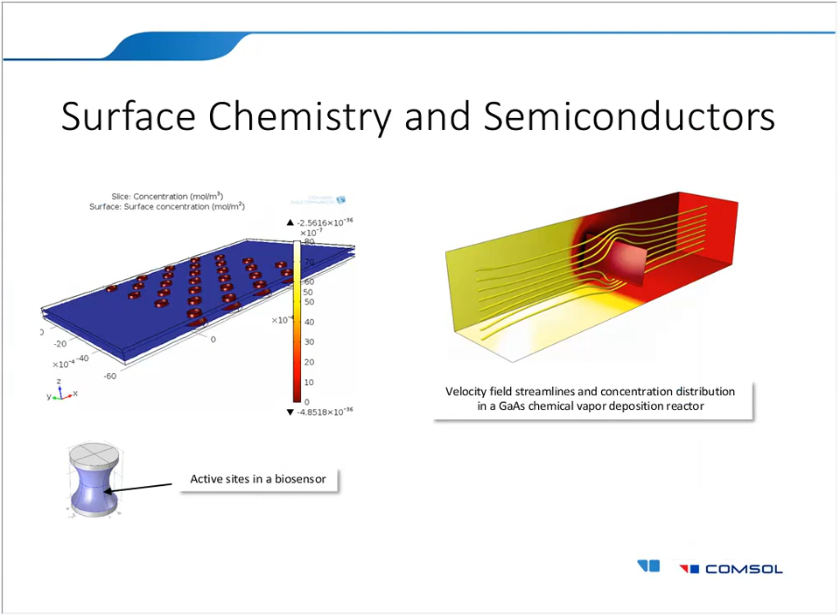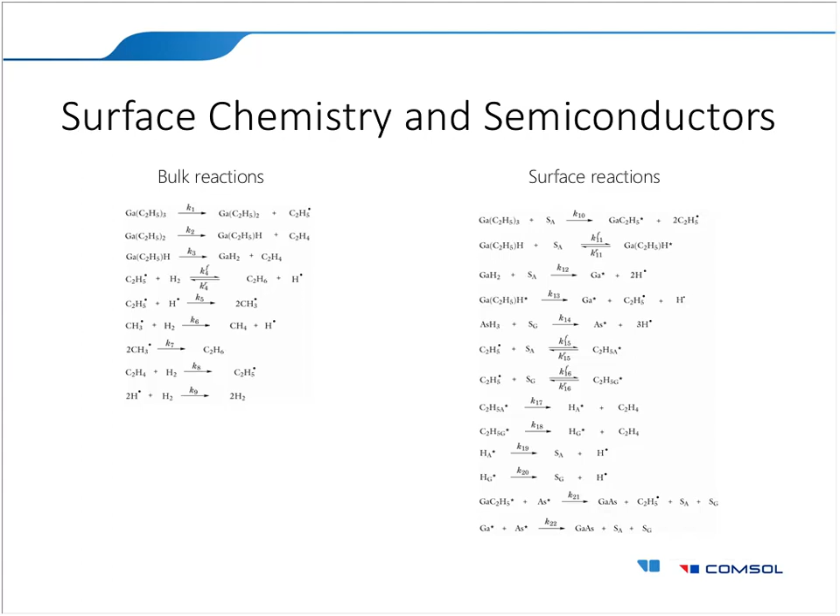And this example is also included in the reaction engineering module, where you have a number of bulk reactions and a number of surface reactions, and the chemistry is described in detail and then pruned in order to treat it in 3 dimensions. And that's done through parameter estimation, of course.